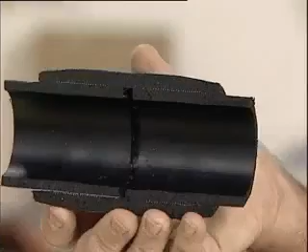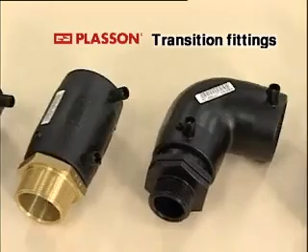Electrofusion is a method of joining polyethylene pipes using fittings with integral heating elements. Sockets join pipes to pipes. Saddle fittings are used for pipe offtakes. There's also a wide range of transition fittings for connections to threads and flanges.

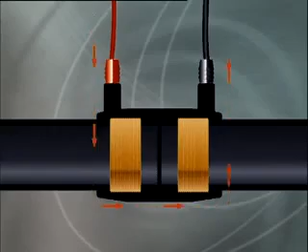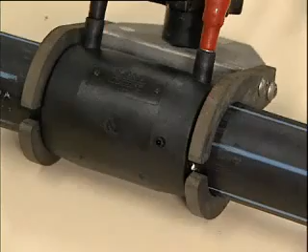As the electrical current passes through the wire of the heating element, the fittings and pipe surfaces melt, generating pressure and forming a completely homogeneous weld between the two. Fusion indicators are forced to rise, indicating the welding process has occurred. After cooling, proceed with the next joint or fitting.

Correct handling and cleaning of pipe and fittings is essential for successful electrofusion welding. Fittings are packaged in a protective plastic bag and should remain packaged until ready for use. Store fittings in the shade. The plastic bag can be used to hold the fitting during installation to prevent contamination.

Avoid any possible contamination of the prepared surfaces. Do not touch the inside of the fittings or scraped pipes with your hands. To clean dirty scraped pipes or fittings, remove any excess dirt with a clean cloth. Then clean thoroughly with Plasson pipe wipes and allow to dry. Make sure fittings and pipes are thoroughly dry before welding.

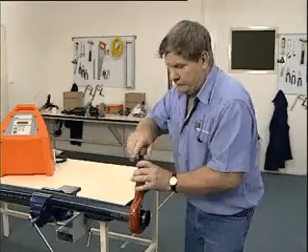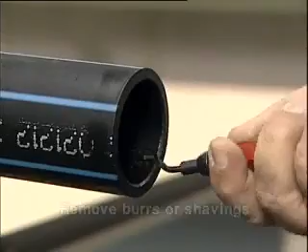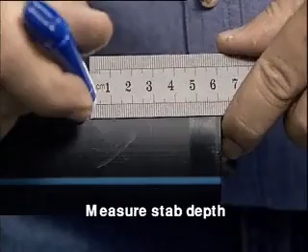Successful joining is achieved by following these steps. Pipe ends must have a square, even cut. Remove any burrs or shavings from the pipe ends. Clean the ends inside and out with Plasson pipe wipes to remove any dirt or contaminants. Measure and mark the pipe ends at the proper stab depth equal to half the fitting length plus 20 millimeters.

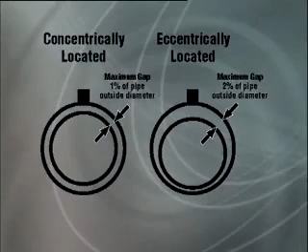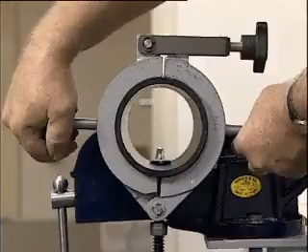Check pipe for ovality and diameter. The maximum gap for concentric pipe is 1% and 2% for eccentric location. Excess gaps can cause problems during the weld cycle, short circuits resulting in overheating. Re-rounding tools are needed to correct excess ovality, which can stop the pipe entering the fitting.

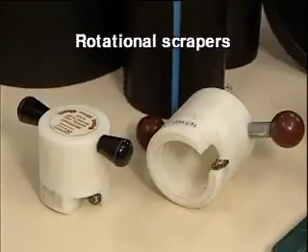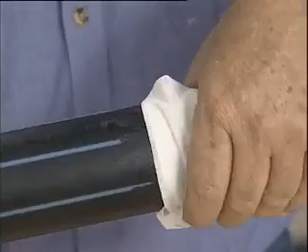Use a rotational scraper to reduce oversized pipe. Use the correct scraping tools. Rotational scrapers do the best job. Scrape pipe and spigot ends on fittings up to the measurement mark to remove all oxidation and contaminants. Remove any dust with Plasson pipe wipes and allow to fully dry before proceeding. Do not touch the inside of the fitting or scraped pipe with your hands.

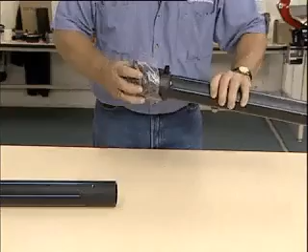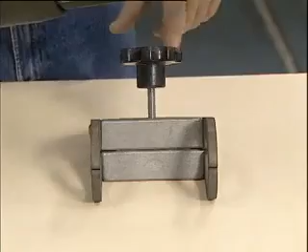Remove the plastic bag from the fitting and slide the fitting onto the pipe until the pipe end meets with the stops in the internal diameter of the fitting. Check measurement mark for proper stab depth. Now repeat these steps for the opposite end of the coupling. Next, place the assembly into the proper clamp tool to stop pipe movement and ensure correct alignment.

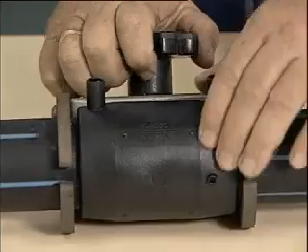Block the pipe ends to stop wind blowing through the pipe. In dusty conditions, welding should be carried out in a welding tent. Make sure the generator is suitable to operate the electrofusion control box with a nominal 240 volts AC and 40 to 70 Hertz. The control box must only be switched on after power has been supplied to the box and the generator has stabilized.

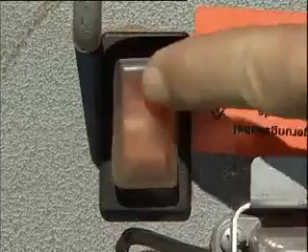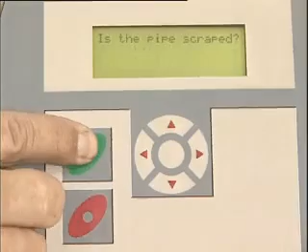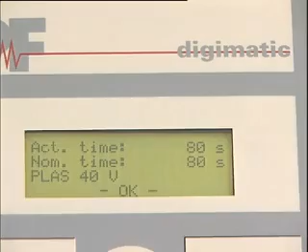Now with the fitting properly clamped, follow the operating instructions supplied with the Plasson Digimatic control box to complete the welding process. Allow the fitting to cool for the required time before moving, pressurizing, or tapping.

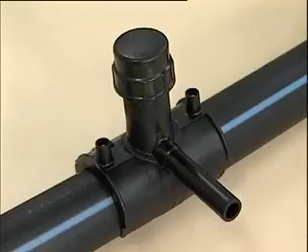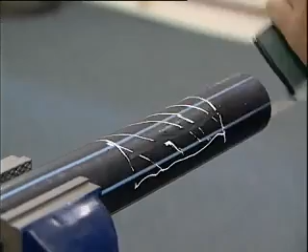To fit the Fusematic 9630 style saddle or branch saddles, first clean the pipe with pipe wipes. Next, mark an area on the pipe at least 150 millimeters in length where the saddle is to fit. Scrape the pipe surface to a depth of about 0.3 of a millimeter. Re-clean with Plasson pipe wipes and allow to fully dry. Do not touch the inside of the fitting or scraped pipe with your hands.

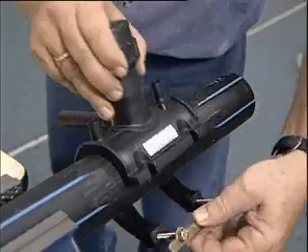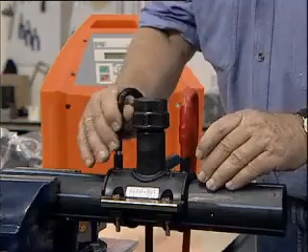Remove the saddle from the bag and fit to the scraped clean pipe surface. Equally tighten nuts until the saddle makes firm contact. Finally, carry out the welding process following the operating instructions supplied with the Plasson Digimatic control box. Allow to cool for the time shown on the fitting label before tapping or pressurizing.

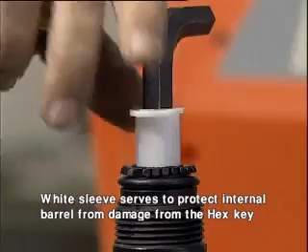After fusing and allowing time to cool, insert the hex key via the white sleeve, making sure that the white sleeve is in position by pushing and twisting it. Carry out the pressure test with the hex key in place. To make the tapping, turn the hex key clockwise until the sleeve shoulder reaches the upper surface of the barrel.

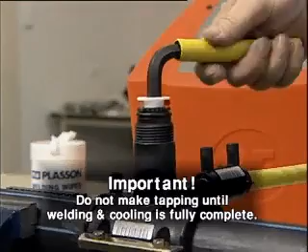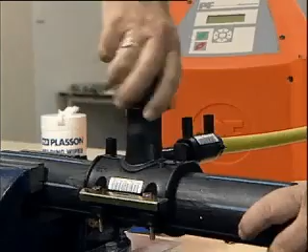To withdraw the cutter, turn the key anti-clockwise until the cutter reaches the upper stopper. Remove the hex key and then the white sleeve by twisting. Tighten the cap until it's firmly locked. The cap can now only be opened with a pipe wrench.

Here's why Plasson Fusomatic, incorporating dynamic monitoring, is the best system for electrofusion welding of polyethylene pipes. Plasson Fusomatic fittings use an automatic weld time recognition system to avoid operator error. And only one weld time suits from -10 degrees centigrade to +45 degrees centigrade. So no temperature compensation is required, no guessing or calculations required, no tables to read from.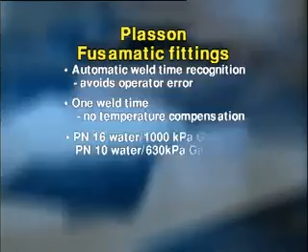And Plasson Fusamatic fittings meet the most demanding technical requirements. A range of fittings to suit SDR11 to 33 PE pipes. And is the only QAS standards mark license system for EF fittings.

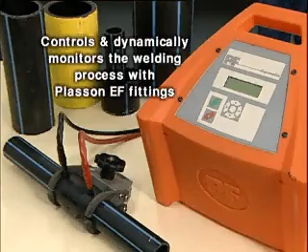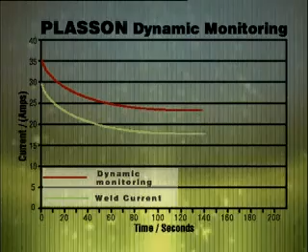Plasson Fusamatic welding control boxes, used in conjunction with Plasson Fusamatic fittings, provide the only available system with dynamic monitoring. This is a unique system in which the control box continually checks the current flow through the Plasson fitting coil and stops welding if the current increases more than 15% for more than 3 seconds. An error message, interturn short circuit, is then displayed.

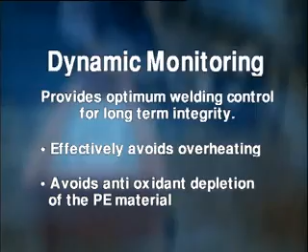Dynamic monitoring effectively avoids overheating and antioxidant depletion of the PE material, which will adversely affect the long-term weld integrity, and ensures these problems are detected and not buried with the pipeline.

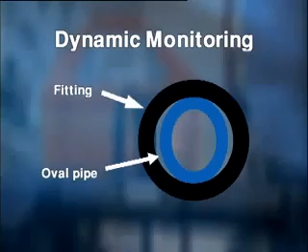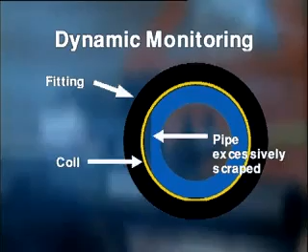Dynamic monitoring can detect and stop welding if the following assembly faults are made: short insertion, oval pipe, pipe not cut square, pipe from coil not inserted square, pipe moves during weld process, electrical fault in the fitting, pipe excessively scraped, pipe damaged by gouging, fitting damage through forced insertion of oversized or oval pipe.

Backed by the most comprehensive range of welding equipment and servicing centres Australia-wide, Plasson Fusamatic polyethylene welding systems offer an unmatched range of significant long-term benefits for pipeline owners looking to the future and specifying Plasson Fusamatic as part of their technical requirements.

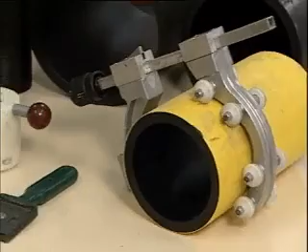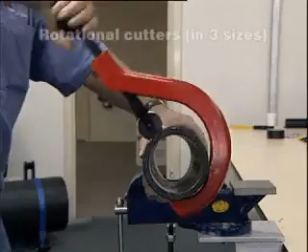To do the job right, you need the right tools and equipment. So we've developed them for you, with everything you need to help create the perfect PE weld every time. Pipe cutters come in 2 styles, the 63mm straight cutter and the rotational pipe cutter in 3 sizes. There's also a guillotine pipe cutter for pipes up to 225mm.

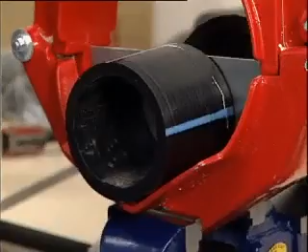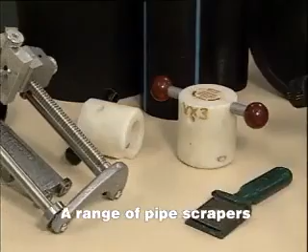After cutting comes cleaning. Plasson pipe wipes are specially formulated for use in electrofusion jointing. To scrape pipes, providing uncontaminated surfaces for electrofusion welding, a range of scrapers is available, from the hand scraper to rotational scraper tools for pipes up to 500mm.

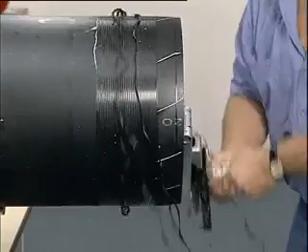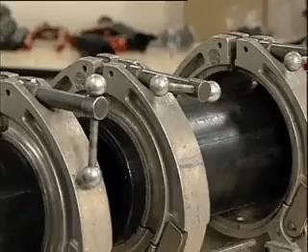The universal mini clamp suits all pipes from 16 to 32mm. The maxi clamps, available in sizes from 40 to 63mm, are robust, lightweight and quick and easy to use. They also promote re-rounding. Until now, clamping systems generally involved heavy metal clamps, many liners and a system requiring the base to be inserted below the pipes.

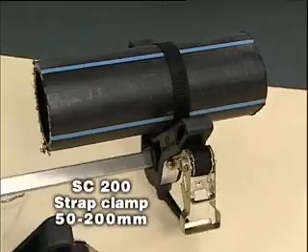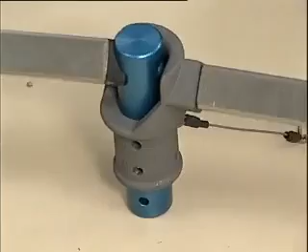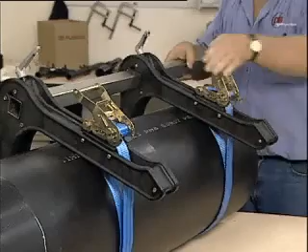Inconvenient, unwieldy and expensive. Plasson are now introducing the strap clamp, a convenient flexible system for clamping and aligning PE pipes during the electrofusion process. A centrally located adjustable knuckle allows it to be used for elbows and reducers, as well as couplers. The adjustable strap fits all sizes with extremely easy adjustment. Suitable for straight couplers, the SC500 clamp has simple adjustment to suit all pipe sizes.

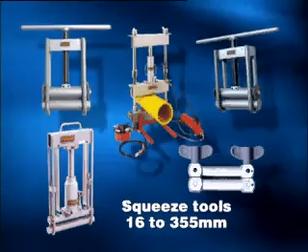For ovalized pipes, a range of re-rounding tools is available for sizes from 16 to 250 millimeters. For squeeze-off of polyethylene pipes, a range of squeeze tools is available for sizes 16 to 355 millimeters. All these tools are available from your authorized Plasson Electrofusion Systems distributor.